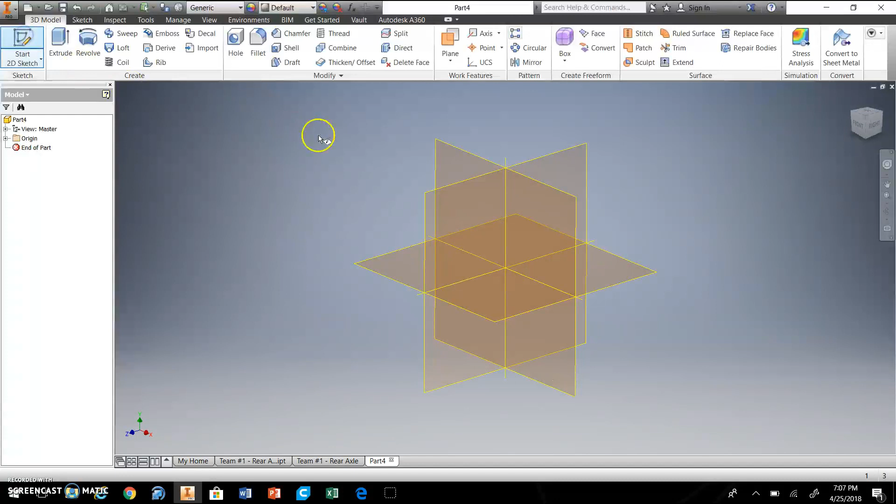You are going to have a round wheel. Do not use the dimensions I'm going to use. 2 inches is bigger than the max allowed. The maximum wheel that you can use is 1.5 inches. The smallest diameter is 1 inch.

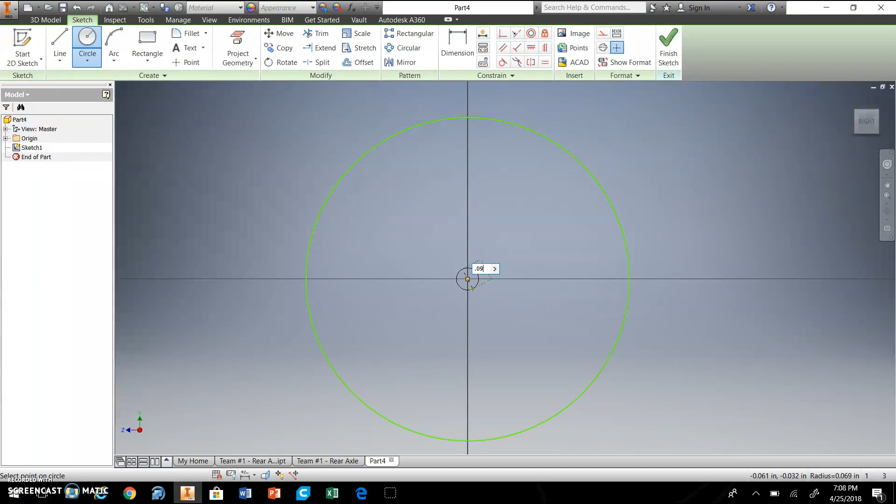Do not use my dimensions except for this one here. Do use this. The hole should be 0.09 inches. That's what works best on the 3D printer.

Now you could finish here and extrude this and have a really basic wheel, or you could finish, extrude, and then later on come back and do cuts into this. Or if you know what your pattern is going to be ahead of time, it's actually easiest to put that onto here. So whatever you want to do, if you want to do something like this, you can do something like put your initials on here.

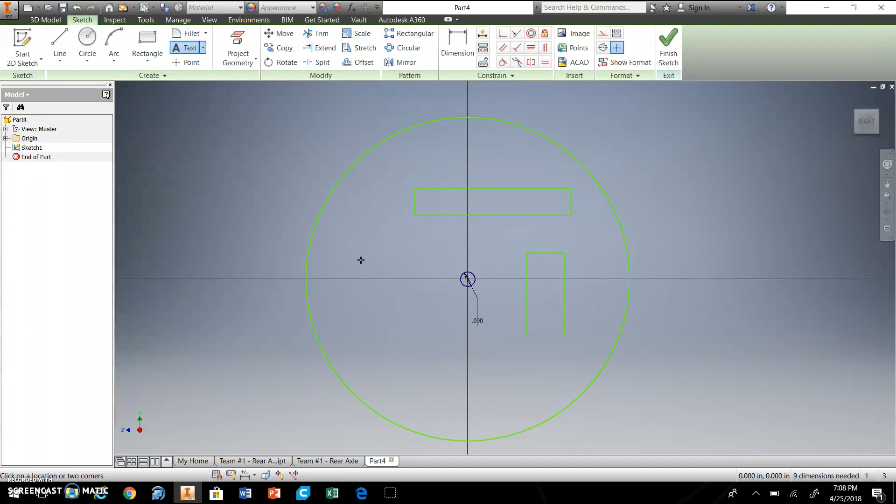My computer is extremely slow.

So you can enter your text into here and put your initials. You can make it whatever size you want. You can change this to 0.5. I think that might end up being too big on my drawing. You can change the font size in there too if you wanted.

And then you can move this, hit the escape button. You should be able to move this—well, if your computer doesn't freeze up on you. You can move that around.

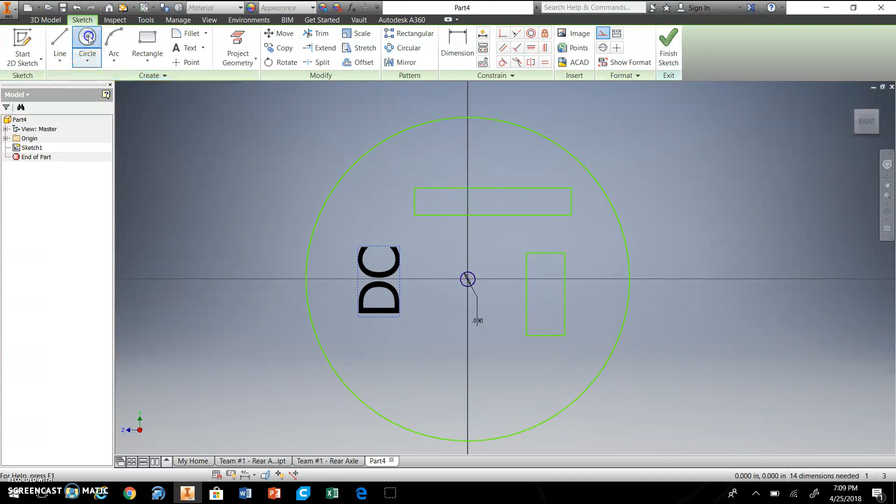You could also put holes into it. All of this is to lighten your part. There's other shapes in here, like a slot. I haven't really played around with this too much. I think you give it 3 points, and oh boy. So you might not want to do that unless you want to do a smaller one.

Ellipses, you can do arcs and cut things in here. You can make a triangle if you wanted to. Get creative—you'll get points for creativity on your wheels here. Now all these are to lighten it up.

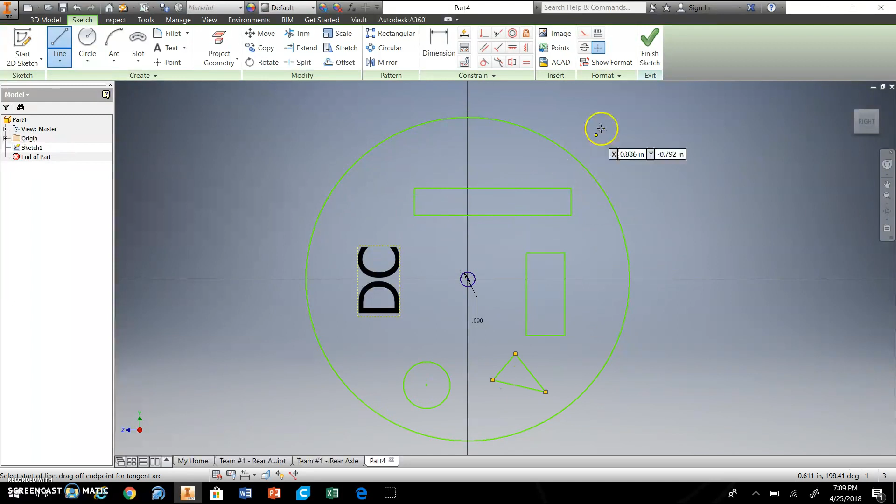Hopefully this will work. When you're going to extrude, it's going to want to know what surface to extrude since you have many different things. So you can extrude just that part of it and leave out those others.

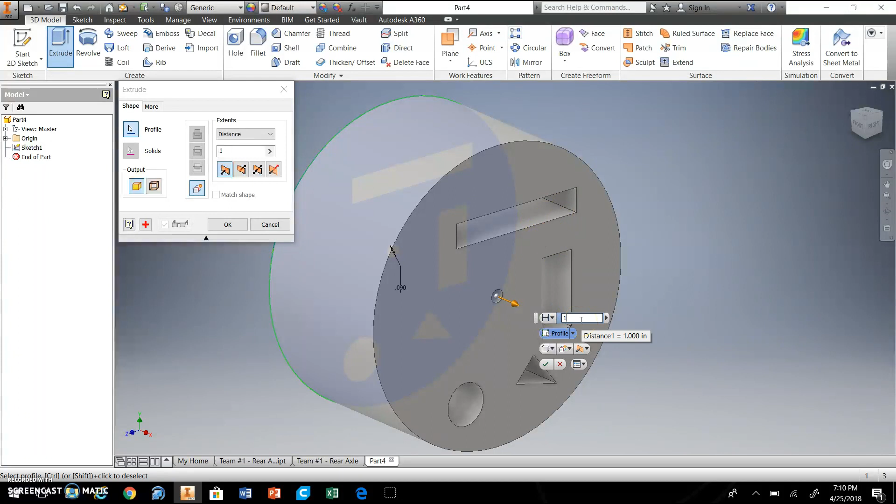Remember, the max thickness is 1/8, min is 1/16. And it looks like I was wrong about the text. If you wanted to do text, let's see if this will work. We'll try again.

I'm going to change the size to the larger size here. Hopefully it'll work this time. I've done this before.

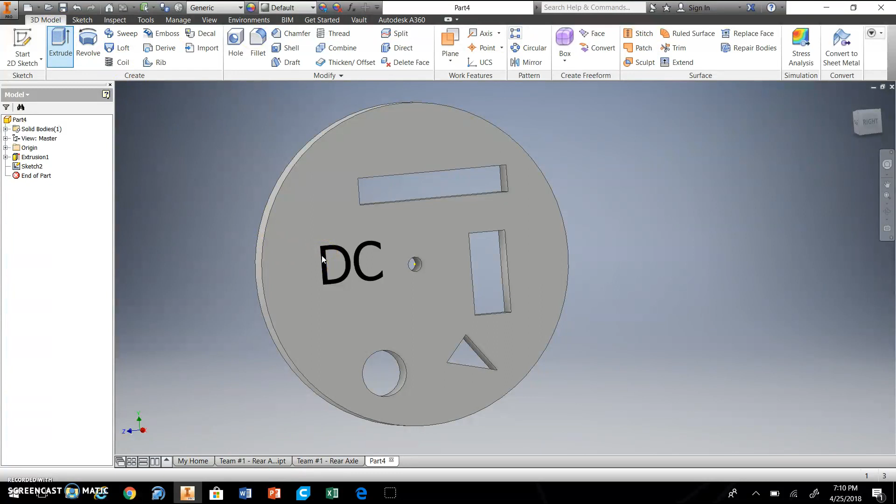Aha, and so you could do a cut. And this is how you can go backwards later and make different holes if you wanted to change things up—you could do this again.

Now notice though, when you print this, this will be gone. That won't exist in the real world because it would just fall out. Actually, it would be on the 3D print, but it would just fall out when you picked it up.

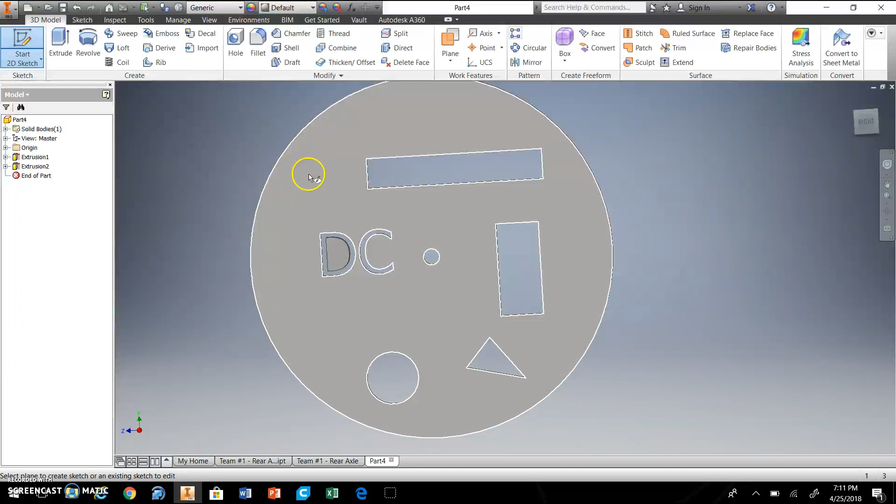So you can go back and change things up if you wanted and put different patterns on here. So if your partner's like, oh, it'd look cool to do this, you could do that and do an extrude cut on that.

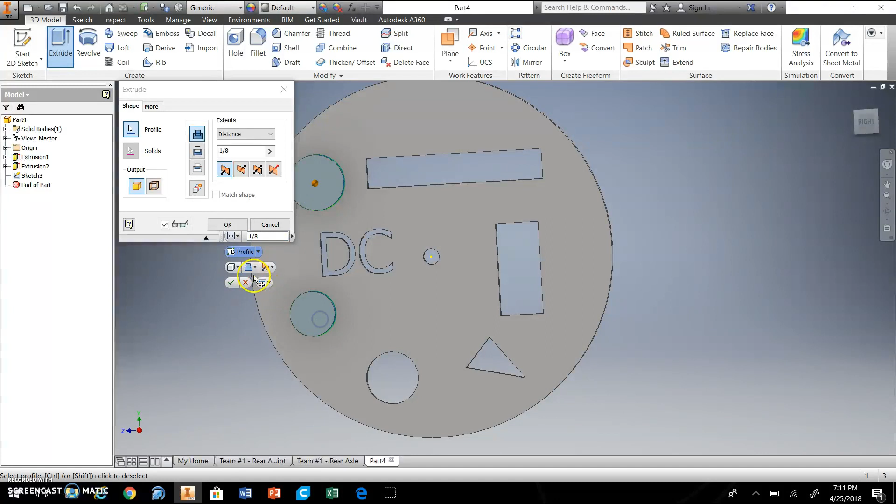Or if you want something to bump out too on a part, you could do it that way, but change it to cut if you want to cut that out of there.

All right, so I've gone back into my sketch, and here's a cool way to do a pattern. So you can put a hole, for instance. You could do a different shape too. I've done this where I put my initials actually and did them all the way around.

I go to circular pattern. You choose the axis that you want to go around, which is the center of the wheel. You tell it how many times you want it to repeat, and then you can click on the geometry that you want to repeat.

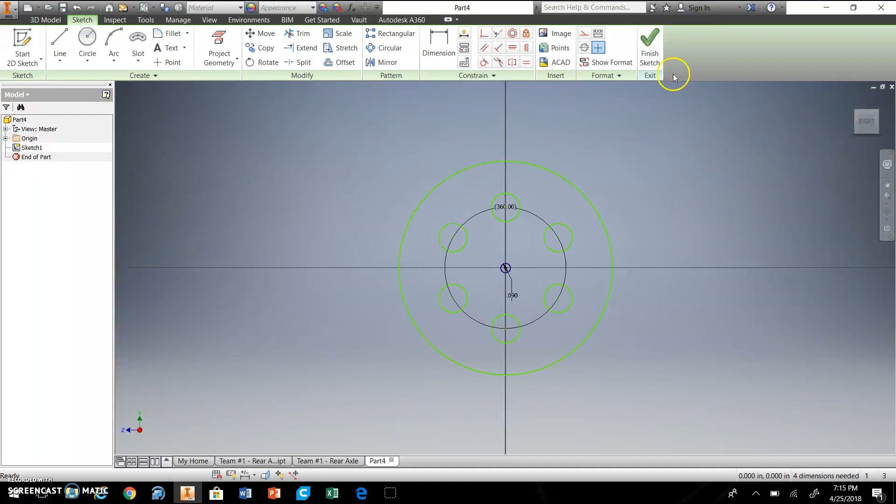When you hit OK, look at how awesome that is. And then you would just extrude and only pick this solid area when you went to extrude.